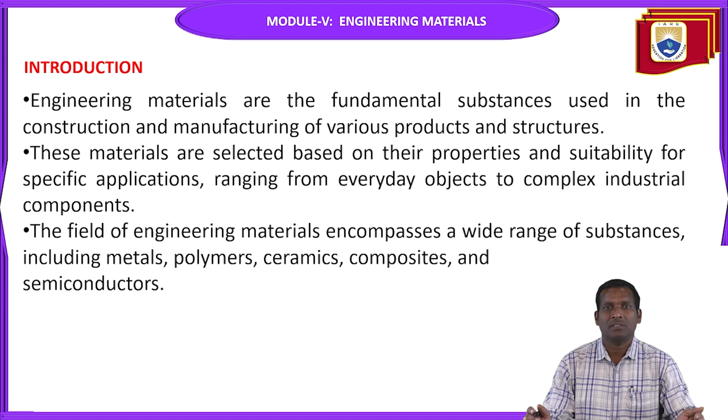If you don't know the nature of the material property, and you use the wrong material for an application, it gives a failed design. So you should have knowledge of all materials and their properties. In this part, ceramics are non-metallic materials. Materials are classified into two types: metallic and non-metallic. Now in this session, we're discussing ceramics.

Ceramics are non-metallic, inorganic solids that are typically made from clays and other natural materials through a process of heating and subsequent cooling. By using this heating process and then the subsequent cooling process, these types of ceramics are made. Through heating and cooling they get certain properties, and you can make the desired materials. They have crystalline or partly crystalline structures and are often brittle but hard.

Brittleness, hardness and ductility are all mechanical properties. The crystalline structure, the atomic structure, is very important for a material. We have already seen this in the engineering materials introduction part.

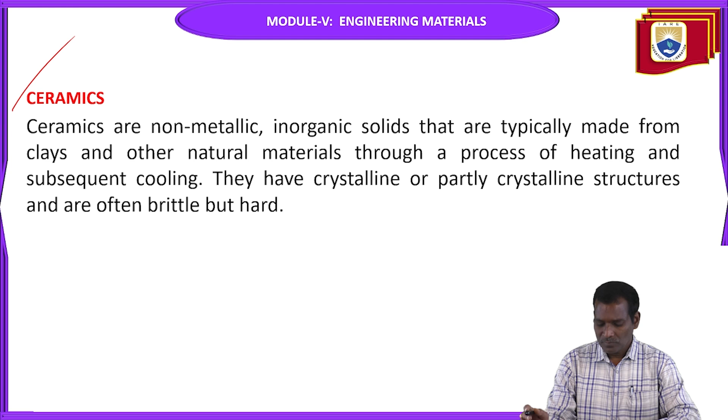Next, properties. What are the properties of ceramics? These materials have high hardness and strength, high melting points, and good thermal and electrical insulation. These properties are very important in mechanical products. Also chemical inertness, and they are brittle and prone to fracture under stress. Whether it withstands stress or not, you should check before selecting the materials.

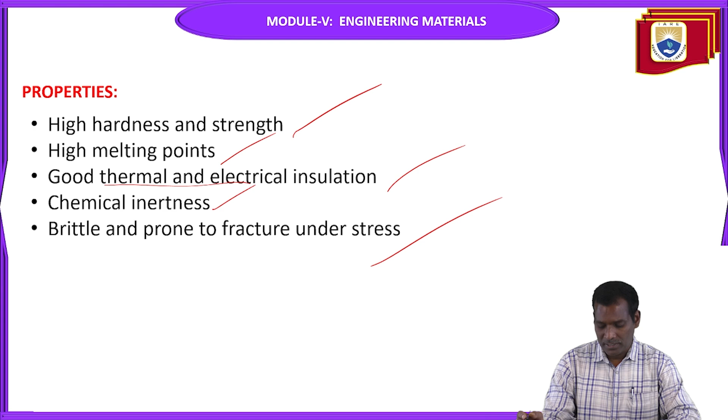All these properties are very important for ceramics: high hardness and strength, high melting point, good thermal and electrical insulation, chemical inertness, brittle and prone to fracture under stress. So what are the applications? The applications of ceramics are in the field of construction. In construction, there are many applications.

Ceramic materials are used like bricks and tiles. Ceramic bricks and tiles are used in building construction for walls. Nowadays everyone uses these ceramic tiles and bricks for roofs and flooring due to their durability and aesthetic appeal. For looks and durability, bricks and tiles are suitable for flooring, walls and roofs.

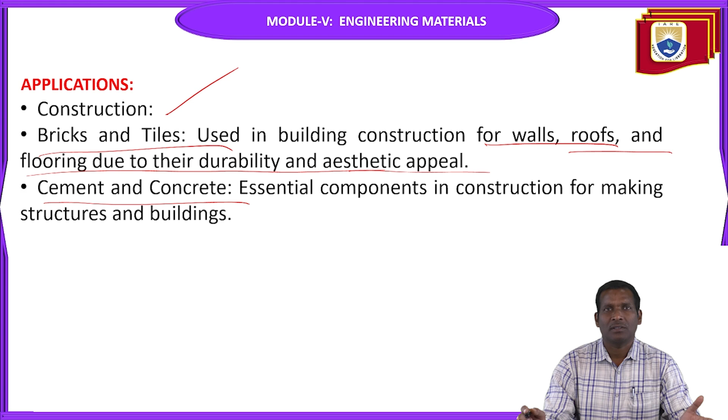Next one is cement and concrete, the essential components in construction for making structures and buildings. Cement and concrete are one of the applications of ceramics.

Next one is household applications. So tableware. The tableware items like plates, bowls, cups, and other kitchenware are made from ceramics due to their hardness and ease of cleaning. The cleaning is easy, and the hardness property. And look-wise also, very good appearance. So that's why the tableware items, the plates and bowls, all come under household applications. You can see in our daily life the ceramic products we are using.

Cookware items like the baking dishes and cookware are made from heat resistant ceramics. So heat resistance, it can resist the heat. And then industrial applications. So industrial applications are refractories used in furnaces, kilns, and reactors due to their ability to withstand high temperatures. So they withstand the high temperature; refractory materials are used in industries.

Abrasives. So materials like silicon carbide and aluminum oxide are used as abrasives for cutting, grinding, and polishing. So these are the major applications in industries. Industrial related applications are refractory materials and abrasives.

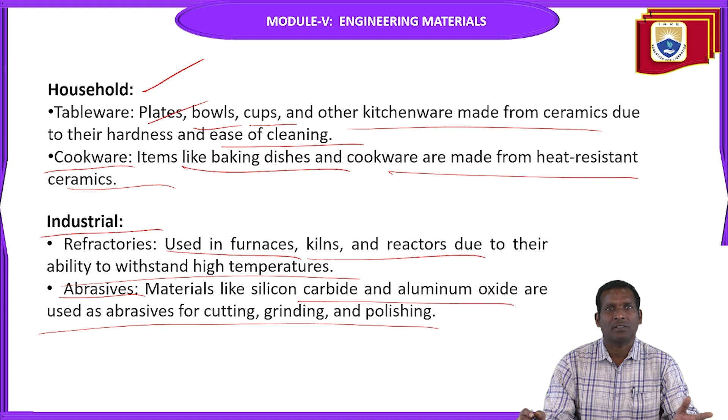So in the medical field, dental implants. Ceramics like zirconia are used for dental implants due to their biocompatibility and strength. Bone substitutes are used in orthopedic applications for bone repair and replacement. So whenever bone repair or bone replacement is required, these types of ceramic bone substitutes are used. Whereas in dental implants, materials like zirconia are used, due to their biocompatibility and strength.

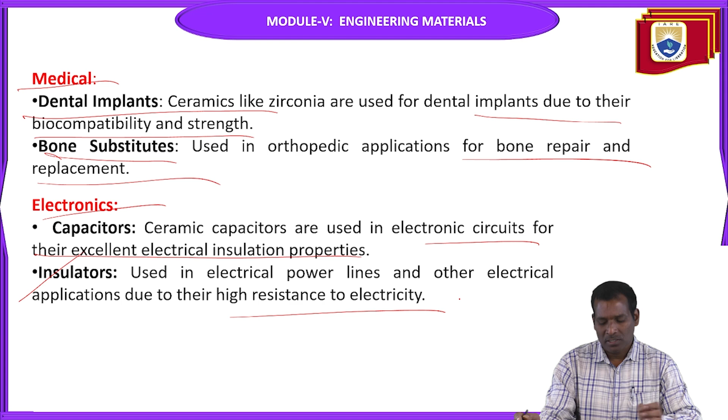So next, electronics. Capacitors. Ceramic capacitors are used in electronic circuits for their excellent electrical insulation properties. And similarly, insulators. So insulators are used in electrical power lines and other electrical applications due to their high resistance to electricity. So these are the major applications in electronics.

And aerospace, the thermal barrier coatings. So thermal barrier coatings, these ceramics are used to coat engine components and protect them from high temperatures. Structural components. High strength ceramics are used in various structural components of spacecraft and aircraft.

And art and decoration, pottery and sculptures. Ceramics are widely used in art for making decorative items, pottery and sculptures. So for decorative purposes, a lot of items are made with this ceramic material.

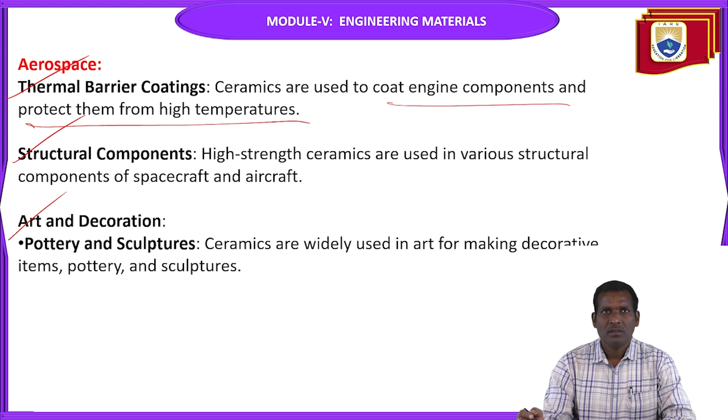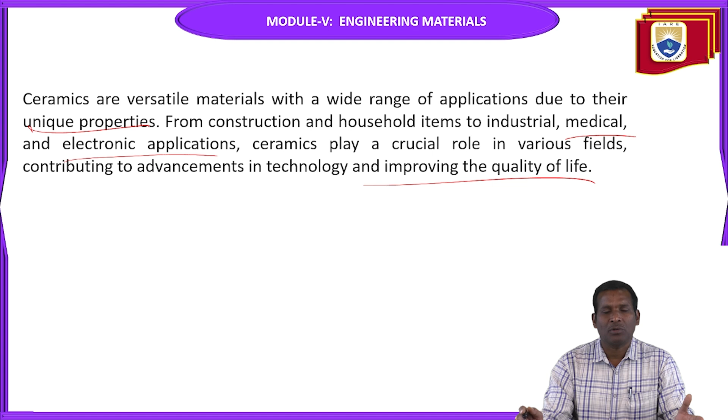So finally, ceramics are versatile materials with a wide range of applications due to their unique properties. From construction and household, the daily life products, to industrial complex products and medical and electronic applications. Ceramics play a crucial role in various fields, contributing to advancements in technology and improving the quality of life. So this is the important role of ceramics in engineering materials.

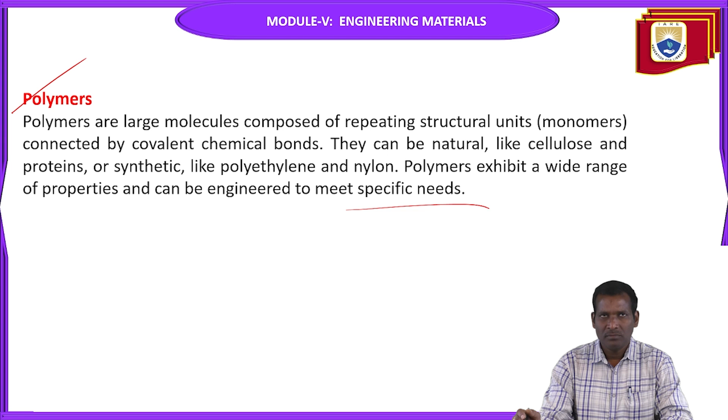So, due to the repeating structural units, the large molecules will be formed. That's why they are composed of repeating structural units called monomers, connected by covalent chemical bonds. So that's why these polymers exhibit a wide range of properties to meet specific needs. Now, the properties of polymers.

One is the lightweight property. Polymers generally have low densities, making them lightweight. Corrosion resistance. They resist corrosion and degradation by chemicals, making them durable in various environments. Flexibility. Many polymers are flexible, which allows them to be molded into different shapes and forms.

Next, thermal and electrical insulation. So polymers often have low thermal and electrical conductivity, making them good insulators. So low thermal and electrical conductivity is what these polymers have. That's why these materials act as good insulators. Varied mechanical properties. Depending on the polymer, they can range from very soft and rubbery to very hard and rigid.

So that is the mechanical properties like strength, ductility, malleability, grip. These all properties vary depending on the type of polymer. They are cost effective. They are generally cheaper to produce and process compared to metals and ceramics. When compared to the metals or ceramics, it is cost effective. So that means it is generally cheaper to produce. Metal production is very costly. Similarly, the ceramics also.

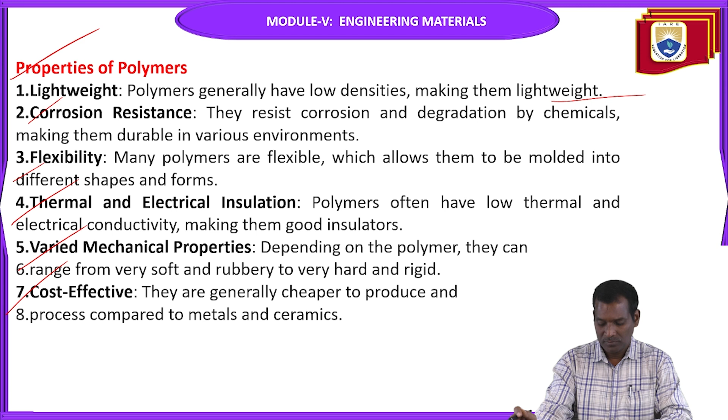So what are the applications of polymers? The applications of polymers are: one is packaging. Plastic bags and wrappers are widely used for packing food, clothing, and other consumer goods. Bottles and containers. So in packing applications, one is plastic bags and wrappers used for packing food, clothing, and other consumer goods. Similarly, bottles and containers are used for beverages, cleaning products, and other liquids due to their lightweight and durability.

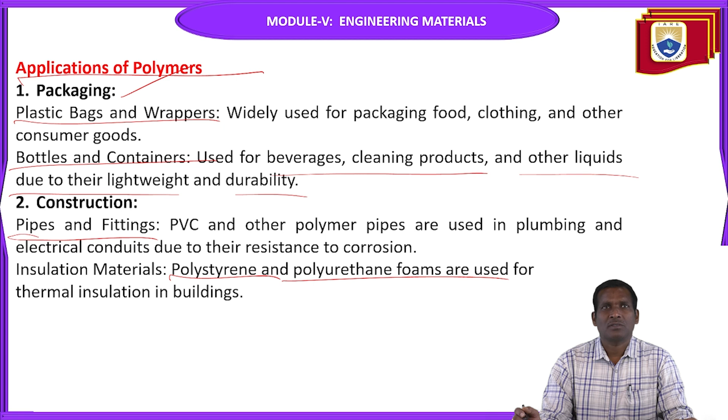Construction: pipes and fittings. In construction, PVC and other polymer pipes are used in plumbing and electrical conduits due to their resistance to corrosion. Insulation materials: polystyrene and polyurethane foams are used for thermal insulation in buildings. So they act as insulation materials and packing materials on the construction side, and polymer pipes and PVC pipes are used for plumbing purposes because of their resistance to corrosion. They are used in fittings. So these are the major applications of polymers.

In electronics, insulating materials like polyethylene and Teflon are used for insulating wires and cables. Teflon tapes are used on electrical wires to insulate and to resist corrosion. Flexible circuits are used in flexible electronic devices and wearable technology.

Automotive: body parts and interiors. Polymers are used to make car bumpers and dashboards, the body parts and interior parts of cars, and interior panels due to their lightweight and impact resistance. Fuel systems: polymers like nylon are used in fuel lines and tanks. So these are the electronic and automotive related applications of polymers.

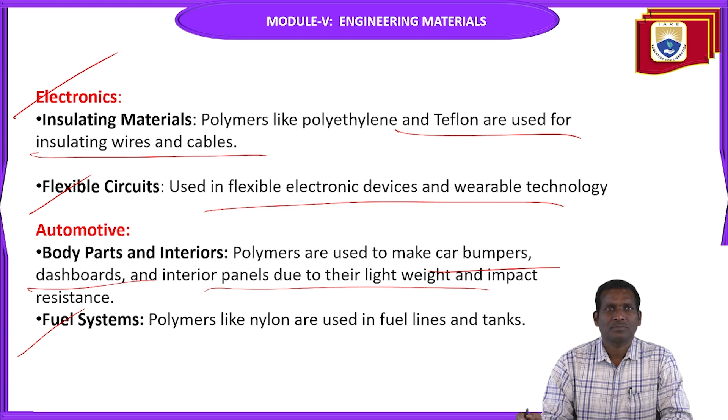Next, consumer goods. In consumer goods, one is toys and household items. Many everyday items like toys, kitchenware, and furniture are made from polymers. Sporting goods: polymers are used in equipment like tennis rackets, helmets, and protective gear.

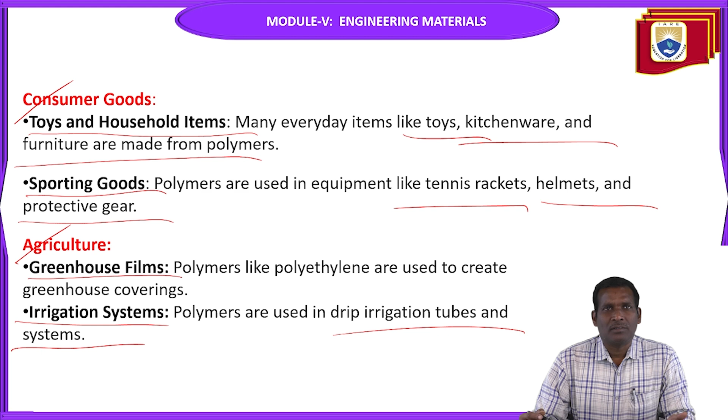Next, agriculture related applications. Greenhouse films: polymers like polyethylene are used to create greenhouse coverings. And irrigation systems: polymers are used in drip irrigation tubes and systems. So in this way, in the agriculture field, sporting goods, the electrical field and construction, polymers are used.

So finally, polymers are incredibly versatile materials that have revolutionized many industries. Their wide range of properties and ability to be tailored for specific applications make them invaluable in everyday life and advanced technological applications. From packaging and construction to medical and electronics, polymers play a crucial role in modern society.

So we should learn the properties and applications of materials like ceramics and polymers before designing any product. That depends upon the selection of materials. Only then will your product succeed in the market without failures. So to avoid failure, corrosion, friction, and wear, you should use the proper materials for the proper application. That's why in engineering tribology, you should concentrate on engineering materials properties.